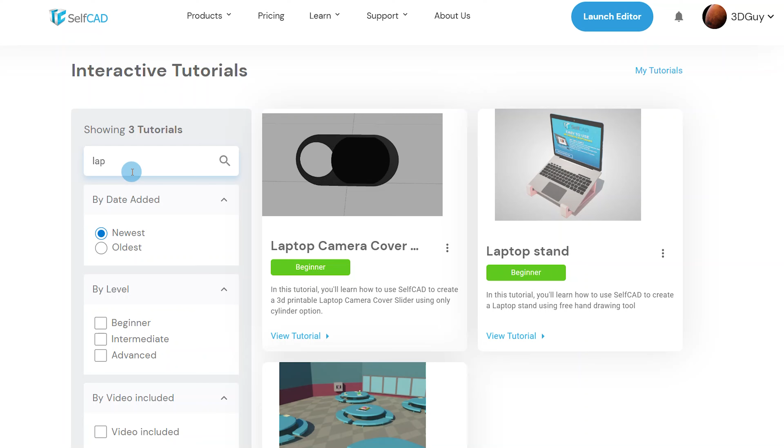First, activate Freehand from the toolbar. This allows us to sketch freely and lets us shape the overall design of the stand. Next, activate the Spline tool. We are using this tool as it gives us more precision and smoother curves. Now click along the grid to draw the side shape of the stand. Each point you add changes the curve and shapes how the stand will look and support weight.

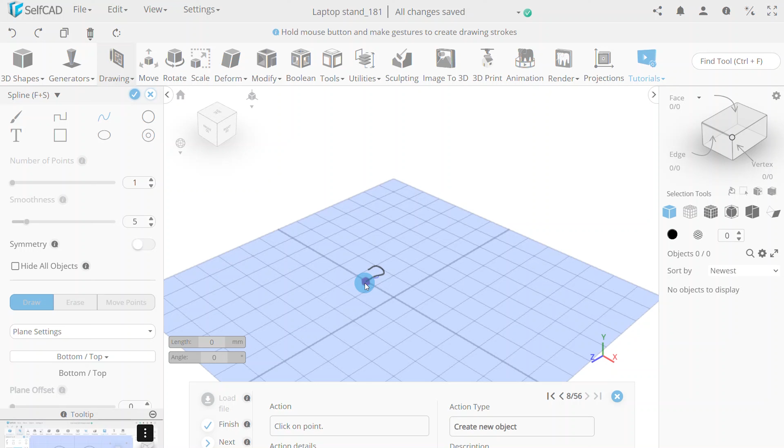As you draw, think about three key areas. That is, the base that touches the desk, the angled support that holds the laptop, and the back section that prevents slipping. Smooth curves distribute weight more evenly and reduce stress points. Avoid sharp transitions as they can create weak zones. If you make a mistake, press the Escape key to stop the stroke and continue refining.

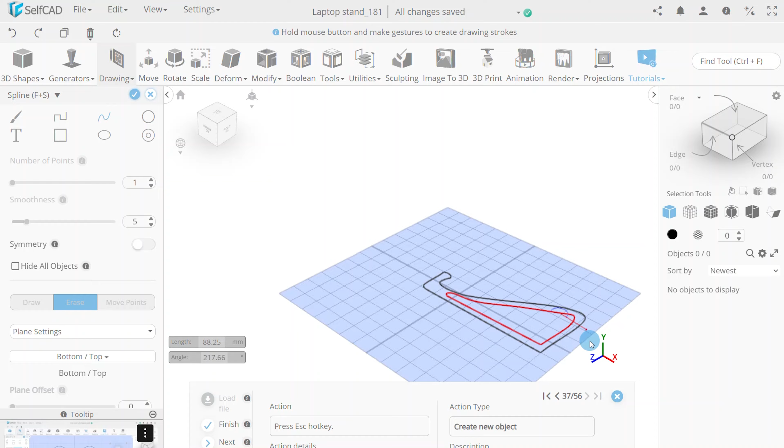Adjust the spline until the side profile feels balanced and supportive. You can switch the spline mode to Erase to refine unwanted sections. This is important because clean geometry ensures smooth extrusion later, reduces mesh errors and produces better print results. Once satisfied with the shape, finalize the drawing.

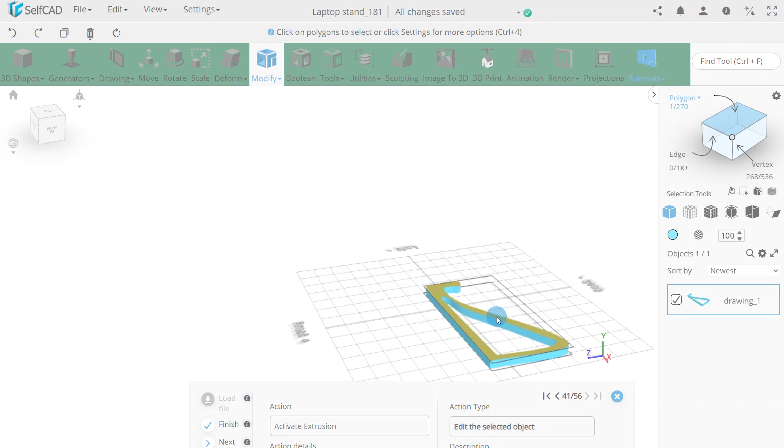Now activate Polygon Selection and select the closed region. Ensure you select the top regions only, as those are the ones we want to extrude. This step defines the solid mass of the stand. Next, activate Extrusion from the Modify category and set the extrusion amount to 35 mm. Then finalize. This converts the 2D profile into a 3D object.

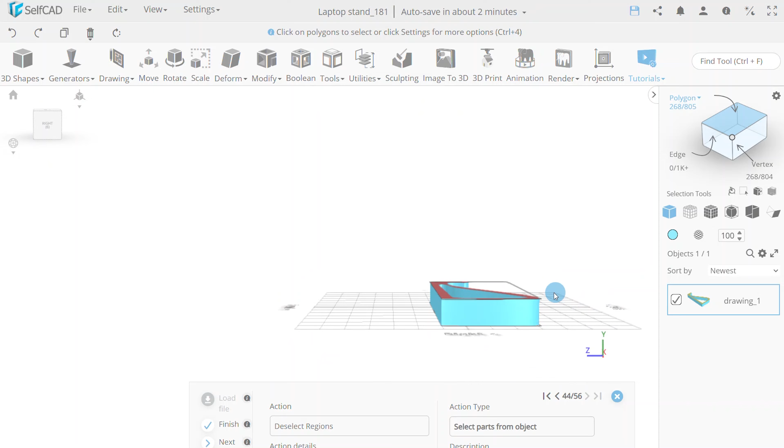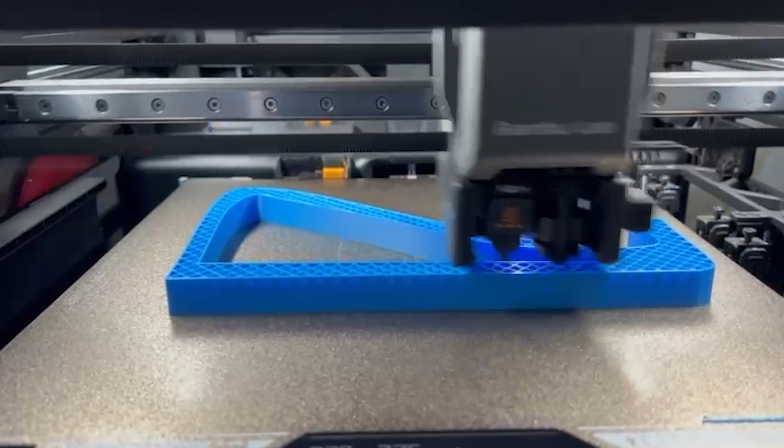The extrusion thickness determines the stand's depth and stability. A wider extrusion increases strength and balance, ensuring the stand can support the weight of a laptop without tipping. But remember, the higher the extrusion, the more printing time and material will be used. Deselect the regions to continue.

Now activate the Rotate tool. Rotate the object by setting Z to 270 degrees and X to -270 degrees. This reorients the stand into its functional position. This is important as we want the base flat on the workspace, simulating how it will rest on a desk.

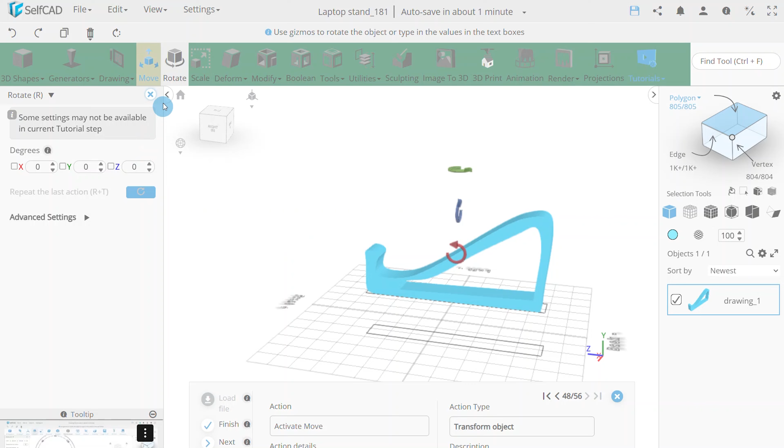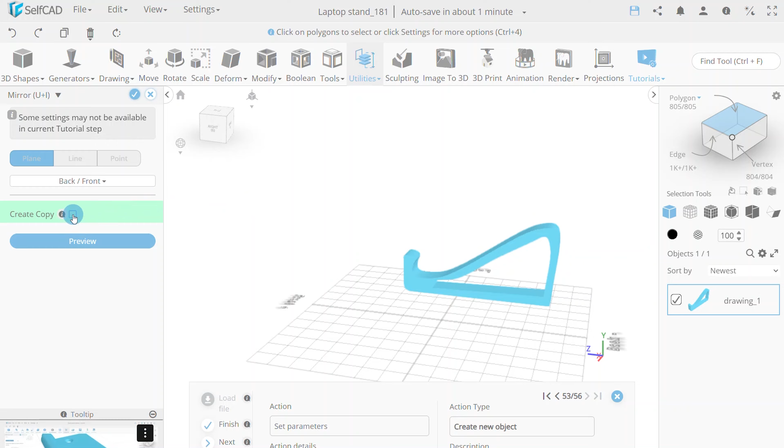Next, activate the Move tool. Set Y to 0 to align the object with the grid. Then adjust X to position it properly in the workspace. Proper alignment improves symmetry and prepares the model for duplication. Now activate the Mirror tool. Set Create Copy to True. This ensures we duplicate the side profile instead of modifying the original.

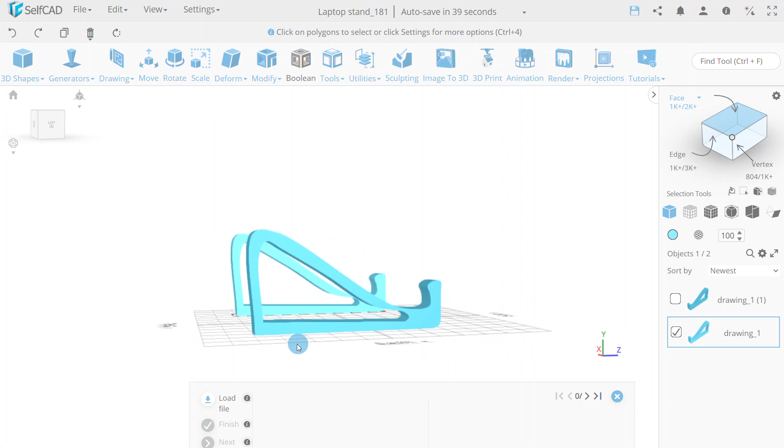Set the direction to right and adjust the offset to 172.55. Then finalize. Mirroring creates the second support leg of the laptop stand. Instead of redrawing the shape, mirroring guarantees perfect symmetry. At this stage, you now have two identical support sides forming the foundation of your laptop stand design.

And that's how you transform a freehand sketch into a functional 3D laptop stand using controlled curves, extrusion, transformation, and mirroring. You can now slice the file, even scale it based on your size requirements, and send it to the 3D printer. Watch as your laptop stand is being 3D printed. After 3D printing both stands, remove them from the 3D printer bed and place your laptop on top.